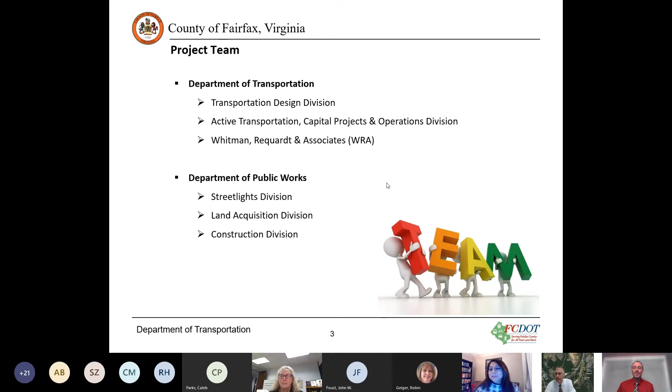Thank you, Mark. I'm Sonia Shanaj, with the Transportation Design Division and project manager for the Innovation Station North Neighborhood Access. As Mark mentioned, this project will provide a direct pedestrian and bicycle connection from the newly constructed Innovation Station to the adjacent neighborhoods. This will also reduce the trip length between the station and the surrounding neighborhoods.

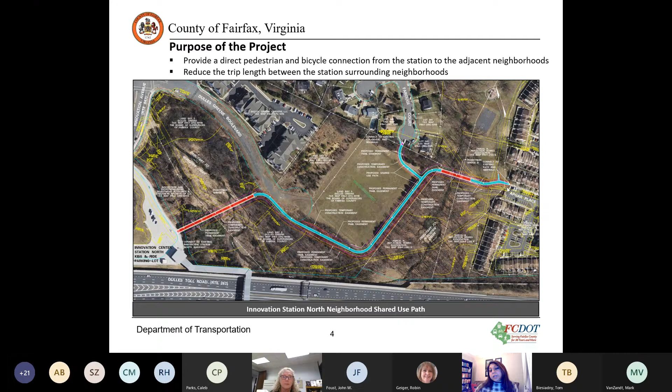On this map, you can see the proposed pedestrian and bicycle facility on an aerial photograph. The red lines are the proposed bridges we'll have to construct to cross Horsepen Creek, and the blue lines show the proposed path. This path will directly connect the Kiss and Ride parking lot at the station, on your lower left, to the Reflection Lakes community at Farugi Court, at the top of the map. It also ties to the townhome community at Apgar Place on the right of this aerial photograph.

This slide shows the existing condition: the walking time and distance from the Reflection Home communities to the metro station. In the background is the Bike Fairfax map, and the yellow line shows the existing sidewalk. As you can see from the insets using Google Maps, the distance from the Reflection Home communities is more than 2 miles. For someone to walk to the station, it will take 40 to 50 minutes.

With this new connection, the distance from the parking lot to Farugi Court is about 1,500 feet, whereas the distance from the parking lot to Apgar Place is 1,800 feet. So you can see this new path will significantly reduce the trip length from more than 2 miles to less than 2,000 feet.

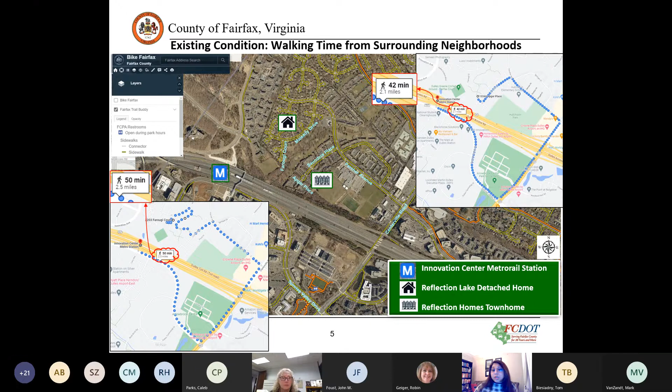This is a typical section of the path. It will be 10 feet wide, a total of approximately 2,000 feet long, with an asphalt surface. We will construct 2 new pedestrian bridges, as I just showed you on the previous slide, and we will also install light poles along the path.

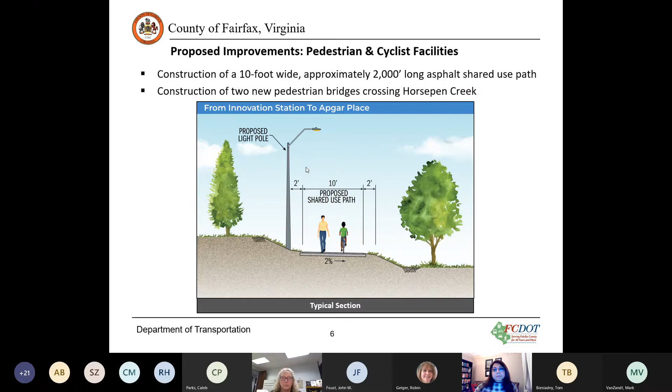This is a bridge section on this slide. On the left is a section at the Innovation Station Kiss and Ride parking lot, and on your right is a picture of the parking lot facing north towards Innovation Avenue.

This is the longer of the two bridges that we will be constructing. It is 367 feet long and 14 feet wide, with steel railing on top. We will have lighting on this bridge, and we're going to have a steel girder bridge with concrete deck.

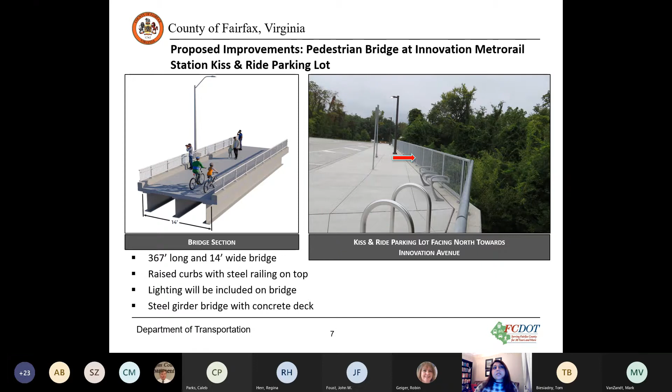We looked into different options for the type of bridge. Our priority was to select the option with the least minimum impact to the environment. The steel girder bridge will require the minimum number of piers, which means less impact to the environment compared to the other option.

This is the elevation of the longer bridge at the Kiss and Ride parking lot facing towards Innovation Avenue. On the left of this rendering, you can see it is connecting to the retaining wall of the existing parking lot, and it will be connected to the Dulles Green Boulevard.

This will be an independent bridge structure, meaning we don't have to modify the newly constructed wall. We only modify the existing handrail to accommodate the bridge opening.

As I mentioned before, our priority is to build a facility that has the least impact to the environment, and we are designing to make sure the pier location is chosen to minimize impacts to environmentally sensitive areas.

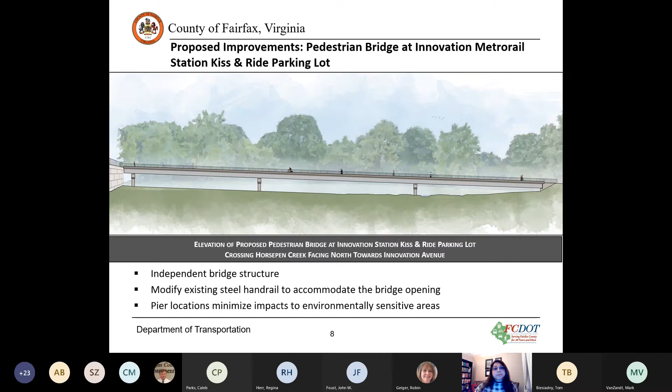This is the other bridge, the shorter bridge near Apgar Place. On the left is the section, the same as the other bridge, except it is shorter. It's 135 feet long and also 14 feet wide with steel railing on top, and it will also have lighting. This is again a steel girder bridge with concrete deck.

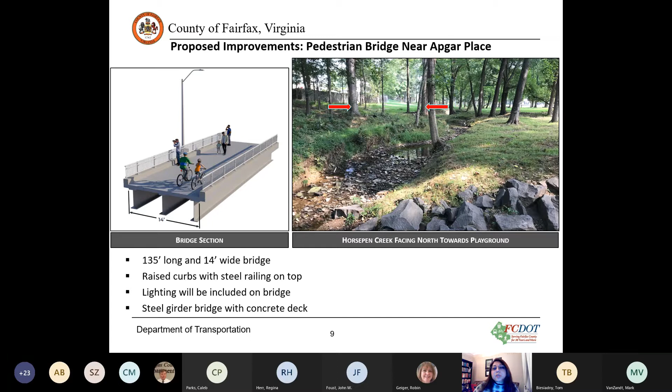On your right is a picture of the creek facing north towards the playground. The arrows on these pictures are the approximate location where the bridge will come through, between these two trees.

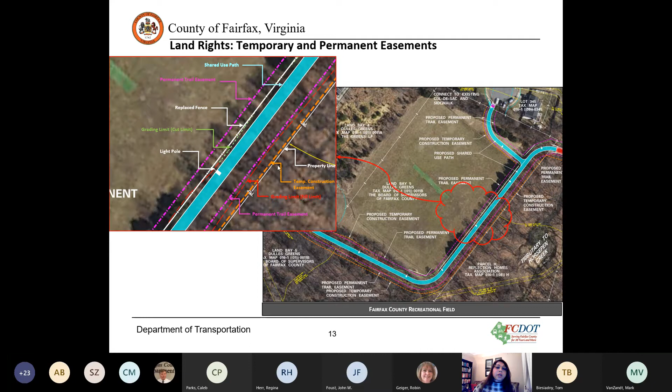In addition to the permanent easement, we will need a temporary easement for construction, shown here as the orange line.

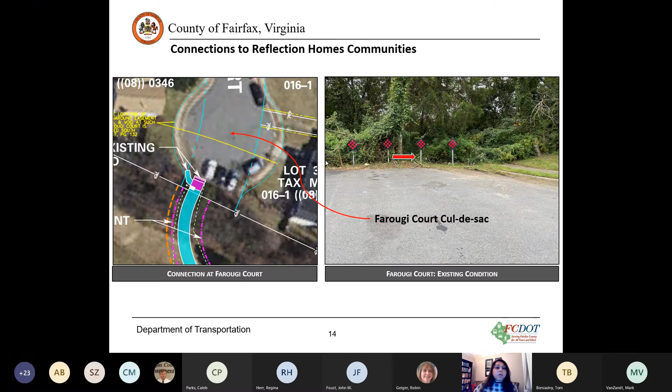This is showing one of the two connections to the Reflection Homes community. On your left is the connection at Farougi Court. This is a plan view, and on your right is a picture of the Farougi Court cul-de-sac. The red here is the approximate location where the future path will tie in. We are going to extend this sidewalk to make sure it connects to this new path.

We are currently in the design phase. We completed our 40% design in November of 2021. The 90% design will be done by fall of this year. We'll have to go through several steps before we start construction in summer of 2024.

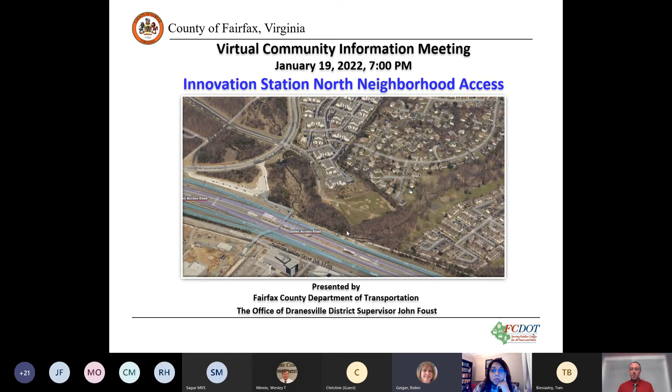Thank you, everybody, for this update. I really appreciate the communication. And my question is about further communication. You put out a schedule that has some planned impacts to Reflection Home Association. What additional planned communication is there for this project, both for community members as well as the board?

So you were asking for further communication on this project? Yeah, what are some of the next steps in terms of communication? I know you published a schedule about design and getting the utility impacts and all that stuff. But what communication is going to be made to the community members as well as the HOA itself, and to foster any collaboration or communication about that green space area?

So what we do, we usually update our website with what's going on, but not with detailed plans. The time that you will be contacted is at the land acquisition phase. At this phase, with our design, our land acquisition agent will reach out to you and show you the plans for necessary easement. So that's going to be winter of 2023. But at any point, if you want to reach out, come to us and look at our plans, you're more than welcome to do that. And like I said, we're going to have our 90% design this year in fall.

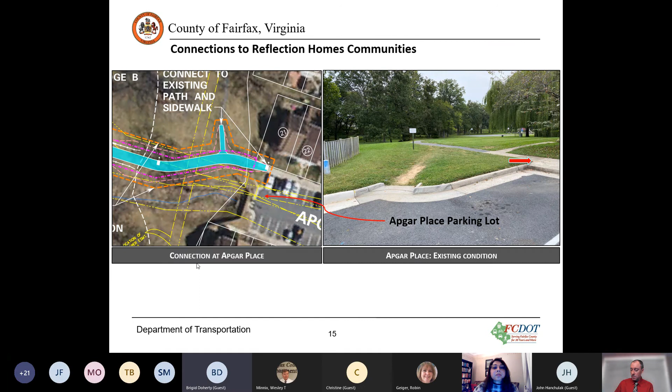Hi, thanks so much, and thank you for this great information. A couple of things. The first one actually is as a result of what I heard here in terms of the plans for the railing. I'm just curious as to how the decision is made based on the steel, the coloring, the black or the silver. Does that change how it feels to the touch if someone actually needs to use that for support? Just curious.

No, it's going to be a material that's not going to make any difference in color or feeling. It's just coated powder, galvanized powder, so you won't feel any difference. And we've been using it, we are using it in other projects, so it's not going to be any difference.

And you're more than welcome to have your input on the color or the railing option. We'd love to hear from you on the feedback of the types and the color as well.

Thanks. Yes, I wasn't at all concerned about color. For me, it's more a question of every now and then when you're walking as a pedestrian and you touch something and it's very hot or super cold, it can be startling. I'm an orientation and mobility specialist. I teach people who are blind or have low vision how to get from A to B, and I work often in a transit-oriented environment. So this is very cool that you all are working on a way to help folks who may be living in these communities have a commute or a walk to and from transit that is so much less time consuming.

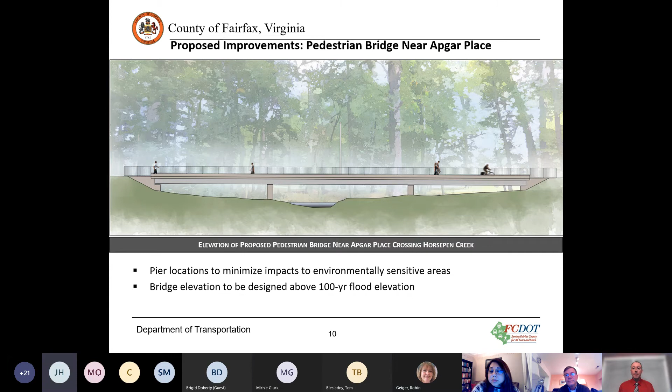Okay, go ahead, John. I was reminded that we had some recent light poles installed in our community, and I noticed that those don't necessarily match the pathway. I was just wondering about the differences between the residential ones that were placed in the RHA community on the path towards the planned pathway, and why those lights might be different, or what advantages there are in those being different.

Okay, so that is our Public Works Division street lights. They're the ones who recommended this type of lighting, and we can talk to them. We will coordinate with them to make sure it is consistent. But this is going to be for trail lighting, and I believe it is different for street light, and I may be wrong.